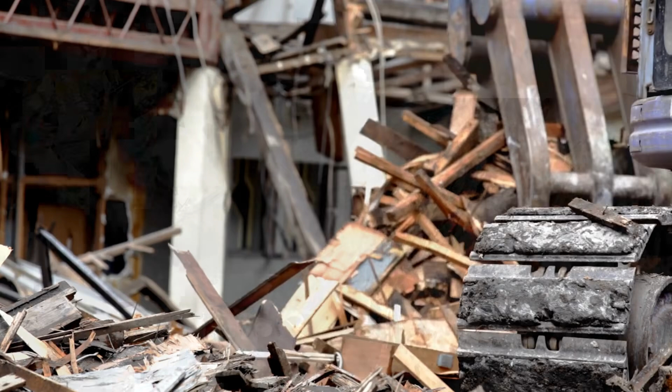According to the NEA's latest waste and recycling statistics for 2022, Singapore produced 7.39 million tons of solid waste. In general, as economic activity increased after the COVID-19 pandemic, more waste is generated as a consequence. Construction and demolition waste, as well as ferrous metals, are the streams that experience the most noticeable increase.

Despite the changes in recycling activities, the rates for paper, cardboard, textile, and leather waste recycling have fallen, as well as wood waste. Singapore remains committed to combat climate change and stay clean, green, and livable, by adopting measures, building a green culture, and investing in new technology and carbon-eliminating facilities.

The National Climate Change Secretariat of Singapore, NCCS, a strategy group from the Prime Minister's office, reported that Singapore revised the national climate target and raised it to achieve net zero emissions by 2050 as part of their long-term low-emissions development strategy and revised 2030 Nationally Determined Contribution, NDC. The NCCS recognizes the enormous green growth opportunity that this commitment to a greener country presents.

Their public website declares the following: climate change, fossil fuel depletion, and rapid urbanization are driving countries to deploy cleaner and more sustainable energy solutions. While climate change clearly poses significant global challenges, it also provides strong incentives for entrepreneurship, research and development, and creative problem-solving to help cities and communities anticipate, prepare for, and adapt to its impact. There are many opportunities for Singapore to develop as a green growth hub that provides green solutions to the world.

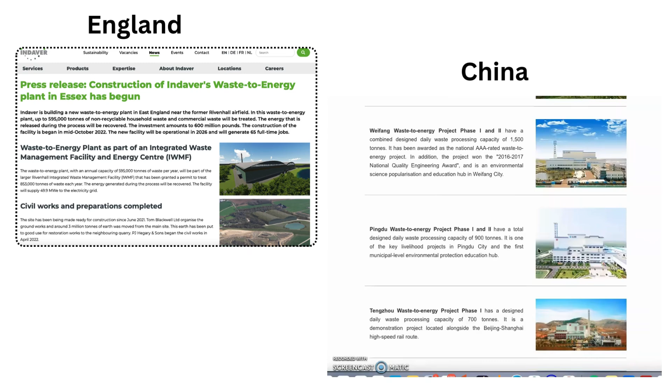We turn unwanted waste into clean energy. Solid waste or any other carbonaceous material from landfill or municipality is processed in our AmaLaTerra waste-to-energy plant to produce ready-to-distribute electricity. The backbone of this joint venture is a novel process method utilizing steam reforming to process waste, carbonaceous material, into clean energy.

Amalaterra holds the Certificate of Registration issued by the Canadian Intellectual Property Office of the Department of Innovation, Science and Economic Development. We are now ready to use the technology as originally intended to make the world a cleaner and better place to live. Steam reformation is a well-known process and has been used for many years in the chemical processing manufacturing industries. For example, production of hydrogen from methane, concrete industry, etc.

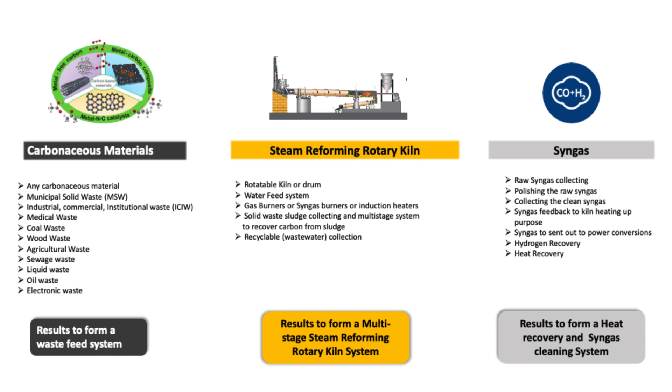The method of steam reformation is a historic process, and the way we use this process in reforming carbonaceous materials is both simple and ingenious. Any form of carbon-based material is reduced to the atomic level of the feedstock constituents and converted into syngas, which is made up of carbon monoxide, hydrogen, and low volumes of other gaseous material.

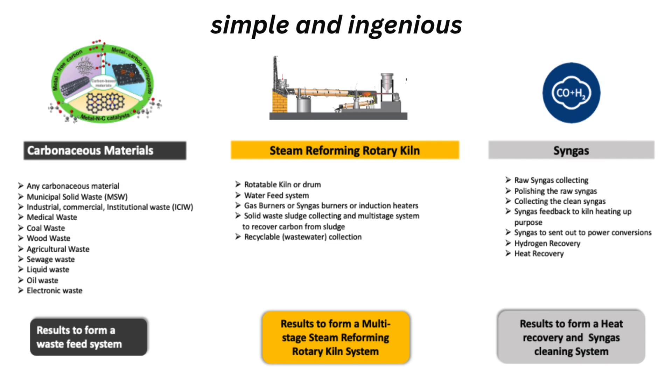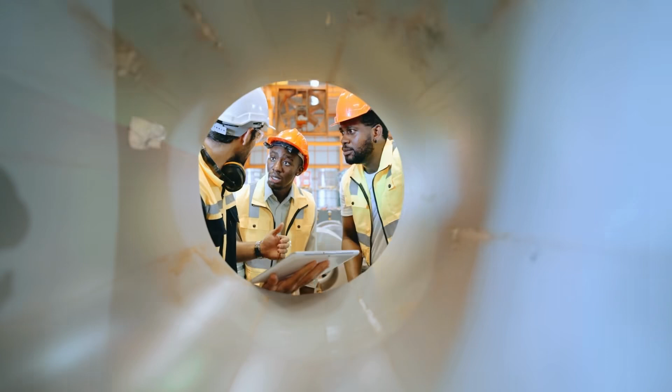Among the strengths and ingenuity of our method, we adopt a novel application of rotary kiln technology and steam reformation for the conversion of waste, and we do not require any exotic materials and catalysts in the reformation process.

There are 4 simple pillars in the Amalaterra waste processing system, all designed to optimize the mass, energy, and water balances of the process: 1. Waste handling. 2. Reactor. 3. Gas cleanup. And 4. Power production.

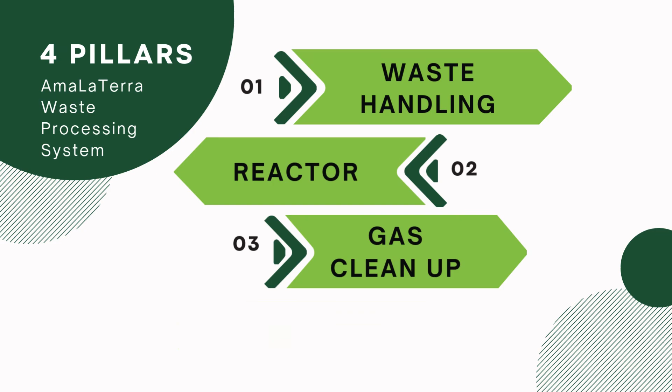Waste is collected and delivered to the facility, where it undergoes sorting of non-reactive inert material in the waste. Preparation of the waste inputs for processing are minimal, requiring shredding and screening. For example, for bulk items, metal, concrete, and glass are removed. All MSW feedstock material is received and processed in an enclosed facility under a low vacuum to improve the aesthetics of the waste's handling and to prevent fugitive dust and odor emissions.

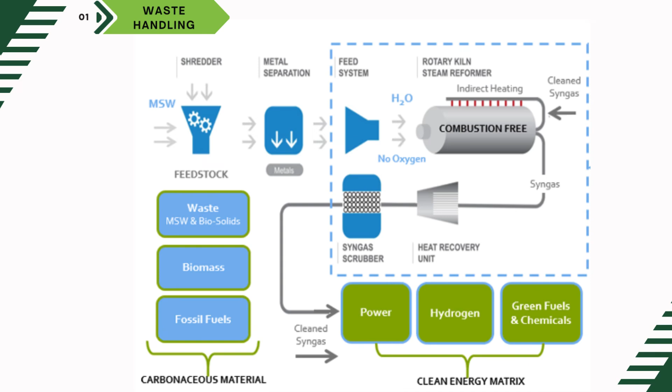Carbonaceous feedstock material may be municipal solid wastes, MSW, or any carbon-bearing materials as a waste stream, including biomass, coke, medical and sewage treatment waste, more particularly wet waste materials. Metals and glass are removed via conventional methods prior to feeding the kiln and are recovered for recycling value. MSW is not required to be dried prior to processing and may be left wet.

Here we have a further visualization of the steam reformation process. As part of the feed system, municipal solid waste, MSW, is first shredded, then segregated and preheated. Commercial lime is added to the shredded feedstock to prevent the formation of chlorides and to eliminate the formation of halogens, furans, dioxins, and acid gases that may be formed in the kiln from contact with oxygen at elevated kiln temperatures. The addition of lime forms benign calcium salts that are removed with the char.

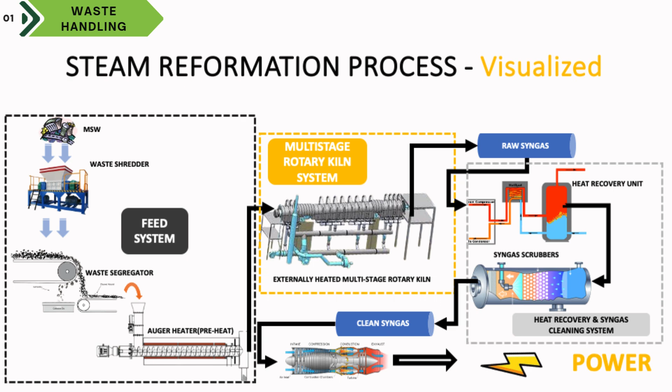This material is fed into a hopper containing a screw conveyor and charged to the steam reforming kiln. At the kiln entrance, high-temperature steam is introduced continuously to purge the MSW of atmospheric air, nitrogen and oxygen, and to prevent the conversions to toxic and undesirable nitrogen oxides, NOx, and/or other oxidized products. The rotary kiln reactor is where the steam reforming reactions occur.

The first stage kiln is heated externally to a temperature range of 550 to 650 degrees Celsius to initiate the treatment, providing sufficient temperature, turbulent mixing, and residence time in the first reaction zone to achieve the target conversion levels, with any carryover metallic materials intact and residual carbon char formed. The first stage products are segregated into 2 streams, a second stage dusty gaseous stream and a third stage solid stream. Dust and particulate matter are captured and removed between the first and second stages.

The second stage gaseous stream is passed to the second stage steam reforming kiln that elevates the reforming temperature to 850 to 1100 degrees Celsius, or higher if necessary to complete the reaction. This second stage facilitates the complete conversion of the carbonaceous gases to a syngas consisting primarily of hydrogen, H2, and carbon monoxide, CO. The third stage further processes and removes solid materials from the raw syngas.

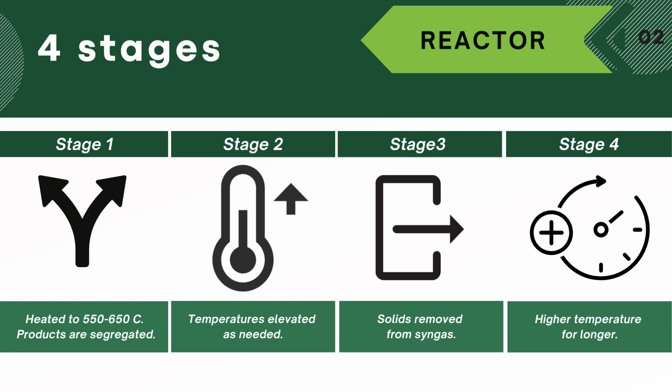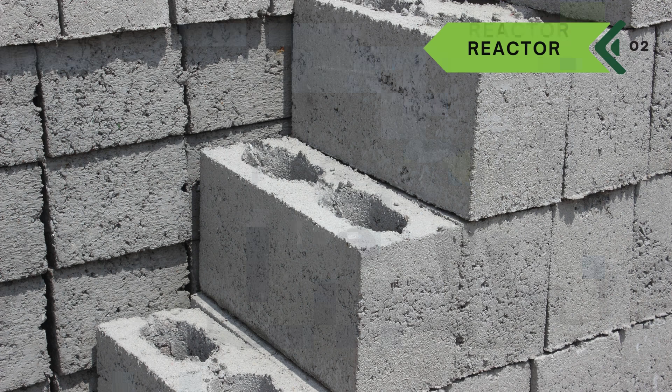An additional fourth stage facilitates the opportunity for higher conversion temperature and longer residence times as MSW composition dictates. These stages are designed to increase efficiency, maximize the output of syngas, and reduce inert materials to a negligible amount. Inert materials such as ash can be used in conventional building materials and road paving.

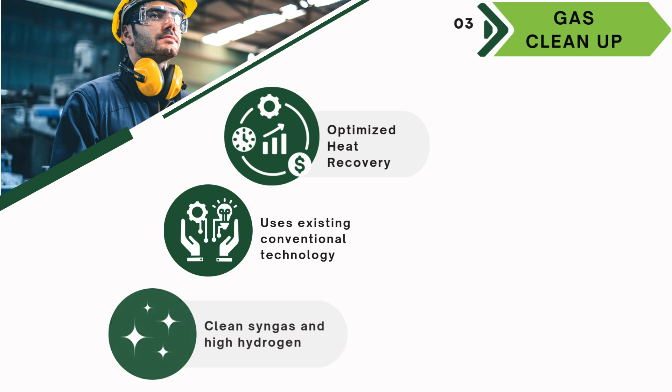The secondary cleanup and polishing of raw syngas and its distribution within the process take place in the following manner. The process design optimizes heat recovery to optimize the efficiency by recovering heat to be reused in the heating and preheating stages. The various stages of gas cleaning use existing conventional technology and equipment at very specific conditions and in a very specific sequence. It results in a very clean syngas with high hydrogen content.

Following the main process steps, the diluted syngas is fed to a combined cycle gas turbine, generating electricity and steam for the plant requirements and providing additional electricity for sale to the local grid. Output is a planned 9.5 MW gross in combined cycle from the designed 50,000 ton per year reference facility.

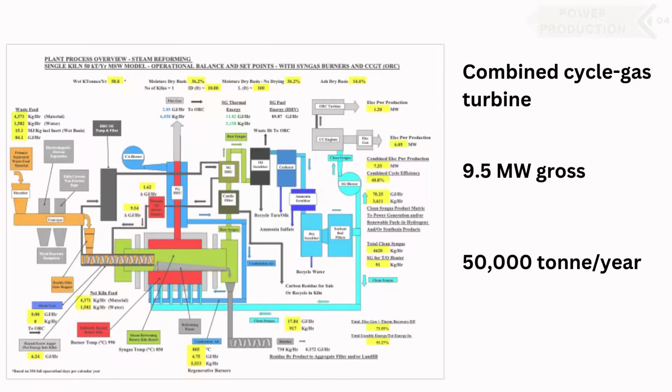Does steam reforming really work? A pilot demonstration plant was developed and built in Ontario, Canada, and was operational for a full 5 years, with approvals from the Ministry of Environment and Climate Change, MOECC approvals Air and Waste, in Ontario for an Energy from Waste program. In addition, confirmation of all steam reformation technology metrics and core technology design was validated.

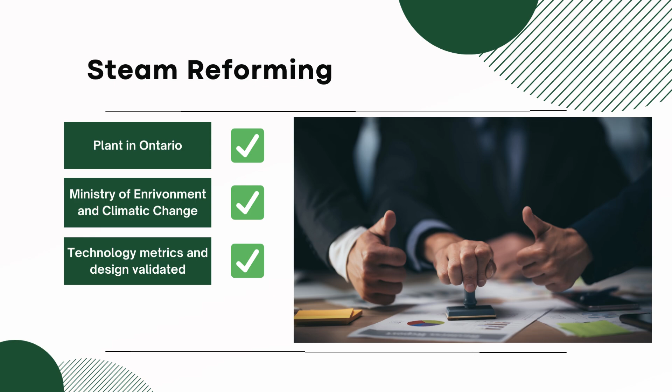Steam reformation is a proven methodology and application with existing technologies, resulting in high-content hydrogen. Power production from waste fuel was successfully tested. The ALT Complete system uses state-of-the-art industry equipment and standards in a unique proprietary way to divert waste from landfills. Operational risk is minimized as no special materials, equipment, or catalyst are required. Steam reformation is proven and it works.

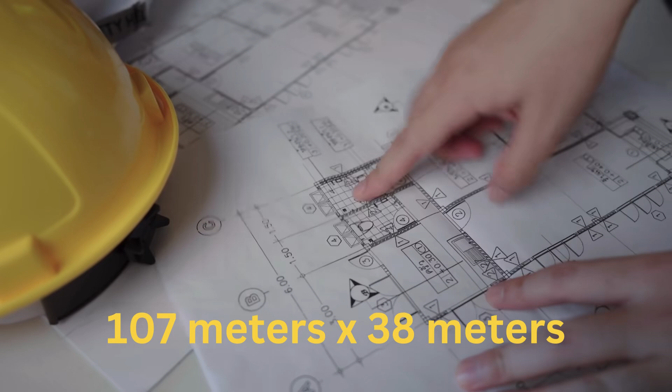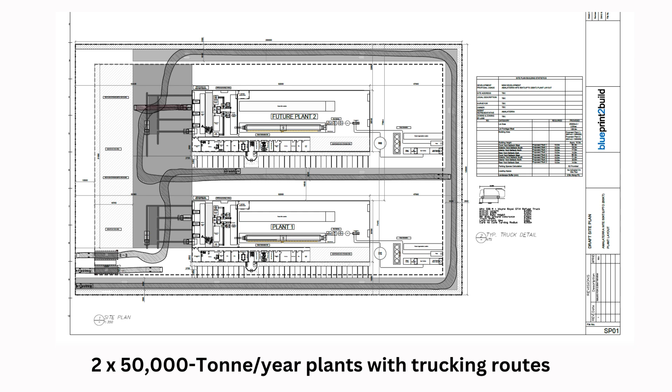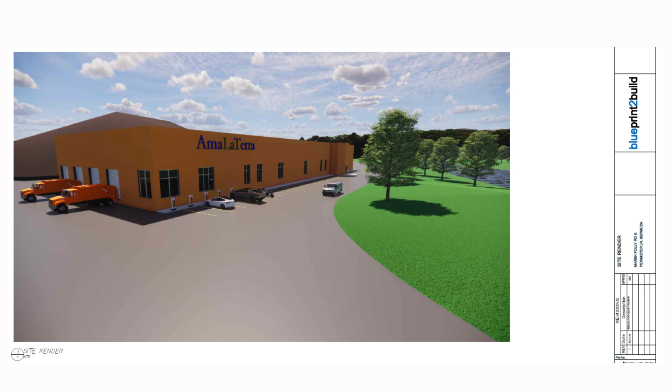And we are confident you will see the value and the enormous potential of its environmental, social, and economic benefits and applications. We look forward to meeting with you to further our discussion.